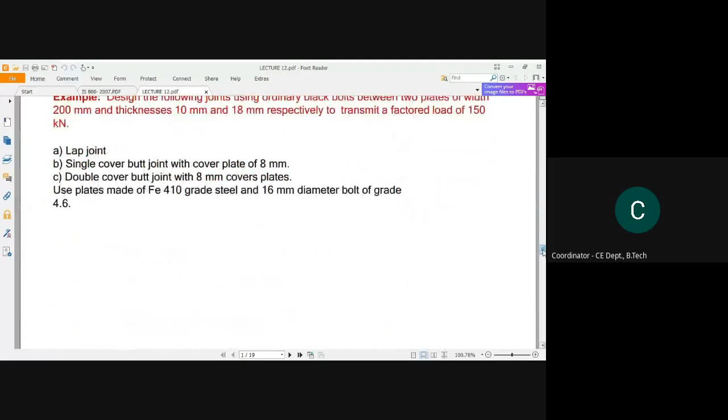In this question, it has been said that design the following joints using ordinary black bolts between two plates of width 200 millimeter and thickness 10 millimeter and 18 millimeter respectively to transmit a factored load of 150 kilonewton.

After reading any question, try to imagine that question in your mind. Think what is the question asking for. Here the question is given, you have to design a joint, and you have to design it in your own way with the help of IS code.

So IS code has given some limitation. We cannot just take any number of spacing or any number of pitch distance, right? So we have to follow that specification and then we have to design it.

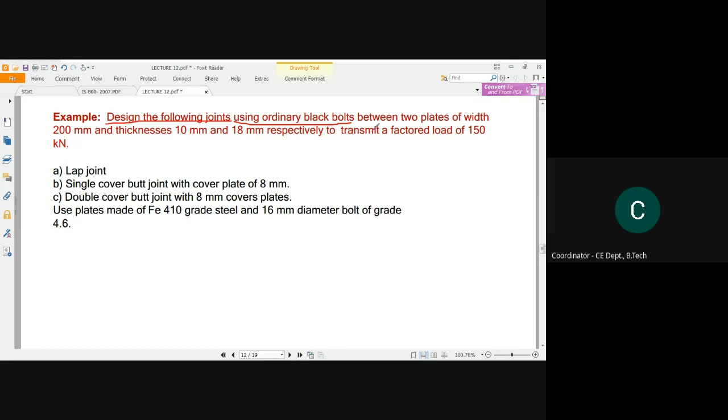The specifications provided in the question are that you have to design with two plates. The specification of the two plates are given: the width is 200 and the thickness is 10, and the other plate's width is similar with thickness 18. These plates have to carry and transmit a factored load of 150 kilonewton.

This means you have to design these connections in such a way that these plates can be able to transmit this amount of load.

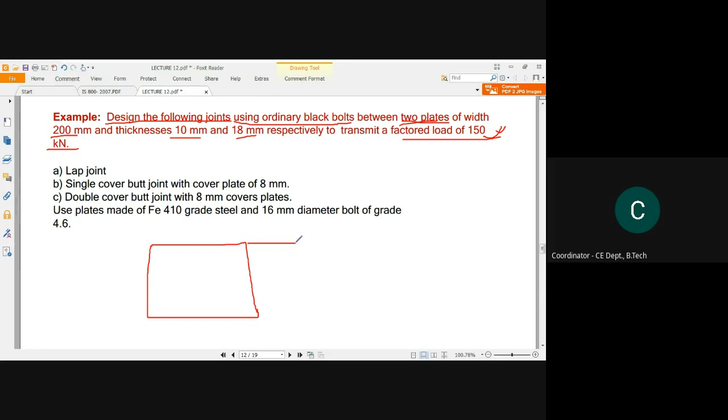This is the plate, this is one plate, and this is another plate. The bottom part is just behind this plate, so I am showing it with a dotted line.

Now the width is 200. This width will be similar for both plates, but the corresponding thickness is different. The thickness of this plate might be 10, and the bottom plate might be 18 millimeter thickness.

So you have to make a connection. You have to design this joint, or put a bolt in such a way that it can transmit a factored load of 150 kilonewton.

After reading this question, you have to be able to understand or picturize this thing in your mind. You have to design this connection.

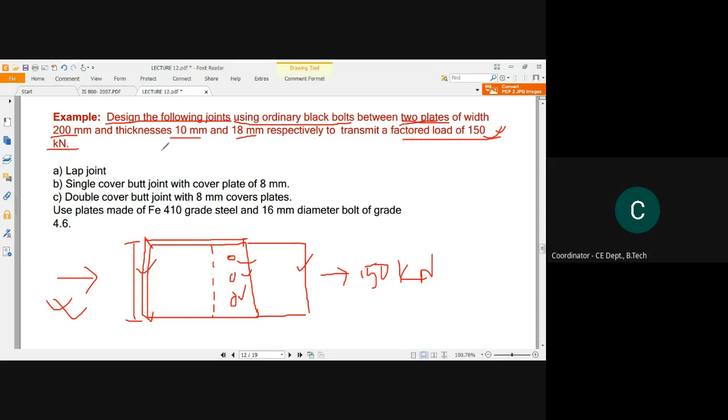Now here is the rest of the question. You have to design this as a lap joint, as a single cover butt joint with cover plate of 8 millimeter, and as a double cover butt joint with 8 millimeter cover plates.

So these three specifications have been given: design this joint first as a lap joint, second as a single cover butt joint with cover plate specification given, and third as a double cover butt joint. I have shown you these diagrams.

What do you mean by single cover butt joint? What do you mean by double cover butt joint? Please go through those PDF slides, you will understand that very easily.

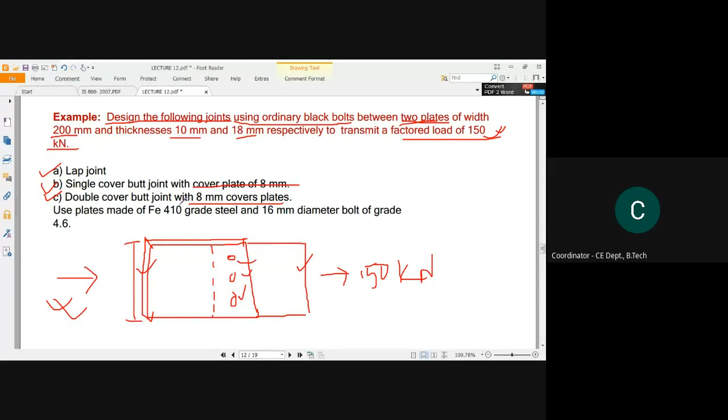Okay, so now let us start our problem. So these are our questions. This part is the question part.

Use plates made of Fe410 grade. So the ultimate tensile stress of the plate has been given as Fe410, meaning the ferrous ultimate tensile stress is 410 megapascal or Newton per millimeter square.

And 16 millimeter diameter bolt of grade 4.6 - the bolt diameter has also been given here, with the grade of 4.6. Let us start the solution.

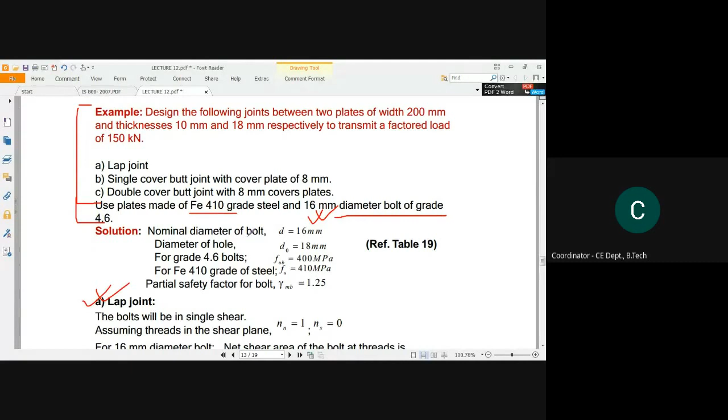We will first solve this connection as a lap joint. Now the nominal diameter of bolt is given as 16 millimeter. Let me zoom it in. So, nominal diameter is given as 16 millimeter.

So what does nominal diameter mean? D means, if this is the bolt, this is the nominal part - the nominal diameter. So now this is given as 16 millimeter.

Now, what will be the diameter of the hole? As I have just shown, see in Table 19 - this has been given in Clause 10.2.1. So here in the clause, when the nominal size of fastener diameter is given in this column, the corresponding clearance has been given in this column.

So what was our nominal diameter in the question? Anyone? What was our nominal diameter?

Why are you getting this? 16, exactly. So here, in the second row, it is given the nominal size of fastener.

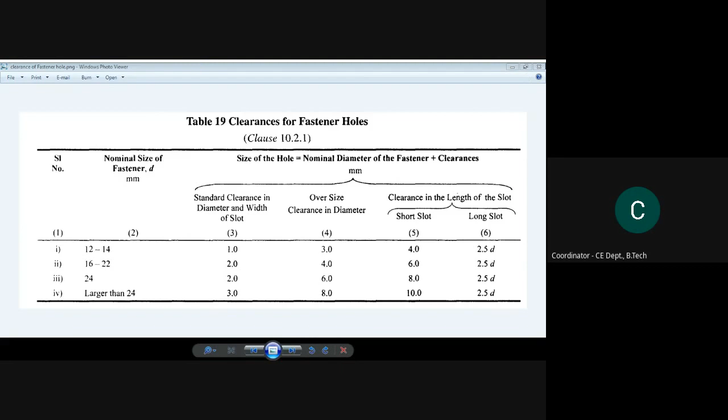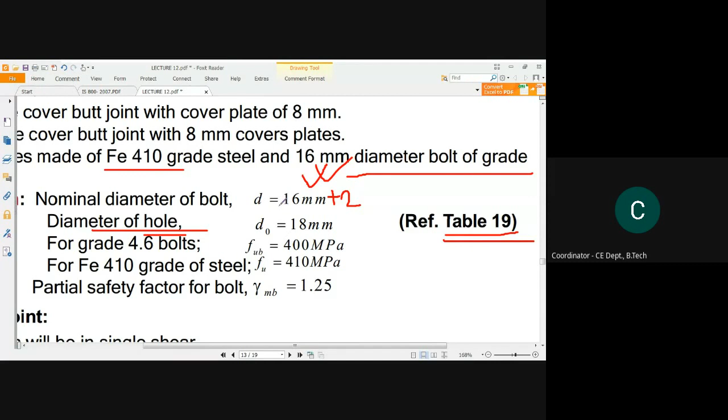In between from 16 to 22, you have to consider the standard clearance to be 2. So similarly we will consider 16 plus 2, referenced from Table 19 of IS 800:2007. So our diameter of bolt is this, and the hole we have to make over this plate should be 18 millimeter.

Now for Fe410 grade of steel, Fu is 410 megapascal, as I said. And the partial safety factor for bolt, gamma MB, is 1.25. This is provided in Table 5, please go through that gamma MB.

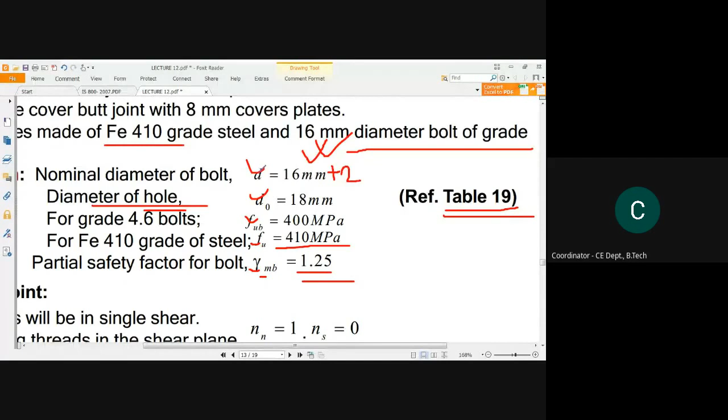So why am I considering these terms, D, D naught, FUB, FU, gamma MB? Why are we taking this? Because we will need this terminology when we solve the bearing strength and shearing strength of the bolt. That is why we are collecting all this data previously from the IS code.

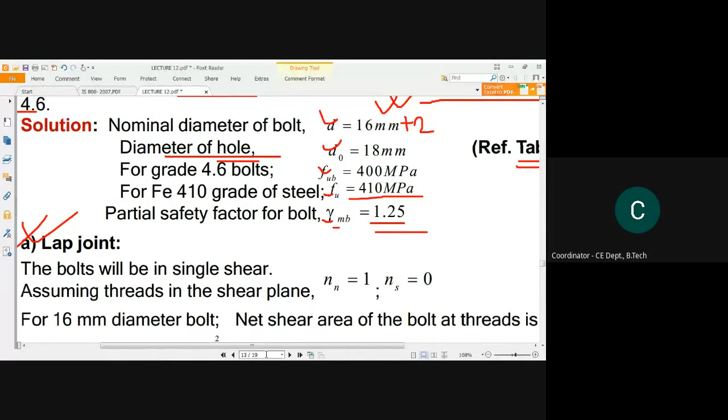Now see, the bolts will be in single shear. So why, how can you presume it will be in single shear? Why not double shear? Because see, this was the joint, right?

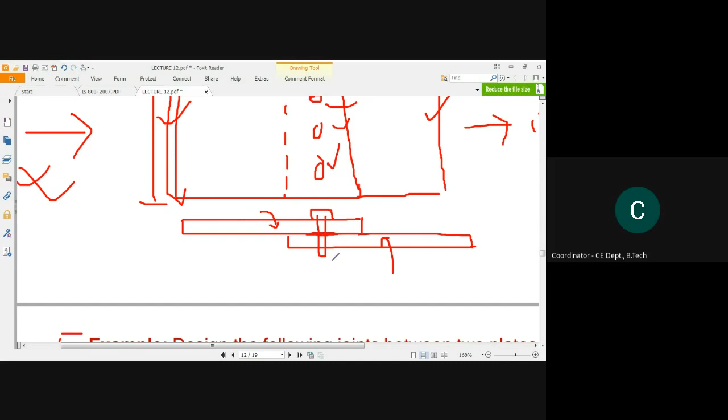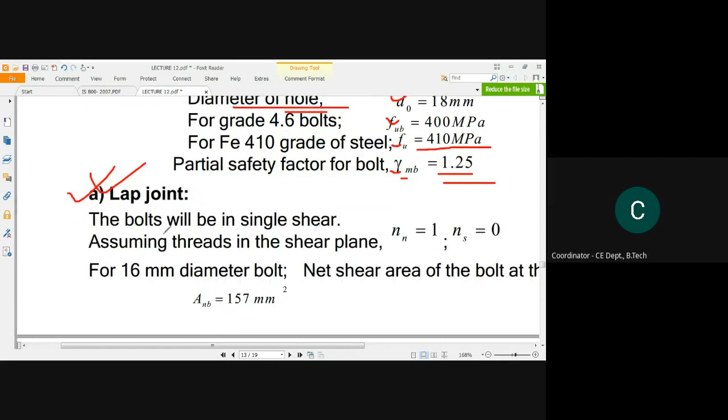So if I draw it from this side, this is the side view I'm showing. So the bolts will be somewhat in this way, isn't it? Here the bolt only has one shear plane provided by these plates. That is why the bolt will only have single shear in that case, because the bolt will be lying in between these two plates, and these two plates will create one shear plane. That is why the bolt will be in single shear.

So I said earlier here, let me just erase it. See, say if this is the 18 millimeter thickness plate, and this is the 10 millimeter thickness plate.

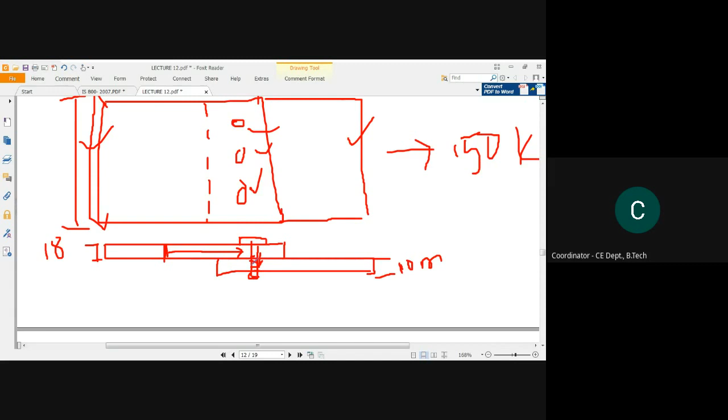Now the bolt, when we are inserting that through the hole, the maximum part will be occupied by the shank of the bolt. So the shear plane may shift just below, or it may go below to the threaded part. If the threaded part starts from here, basically the threaded part has spread to the maximum part of this bolt. So we will assume that one plate will lie upon the thread.

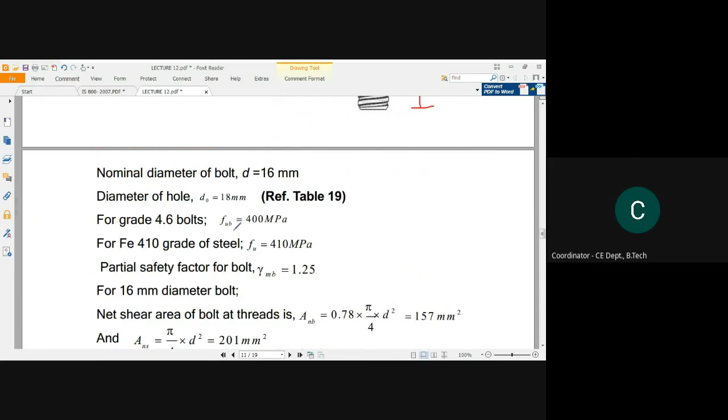This is basically a general scenario, that a shear plane lies between the threaded part. So here, that is why NN is considered to be 1, NS is considered to be 0.

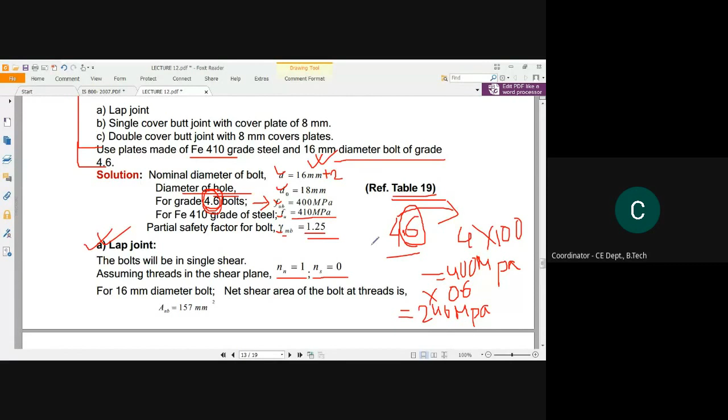So is there any problem observing this grade 4.6? In previous class I told that 4.6 grade means 4 into 100 times, meaning 400 megapascal will be the ultimate tensile strength of bolt, and 400 into the rest, 0.6, that is 400 into 0.6 will be 240 megapascal. So this will be our yield stress of the bolt. So from this 4.6, you can get the value of the ultimate tensile strength of bolt.

Say if this 4.6 was designated as 5.2, just considering, so what will be the ultimate tensile strength of bolt? It will be 5 into 100, 500, and the yield stress will be 500 into 0.2, 100 megapascal. Clear? Yes ma'am.

So this is not given in the IS code. You have to calculate this from the bolt grade given. It will be given in the question.

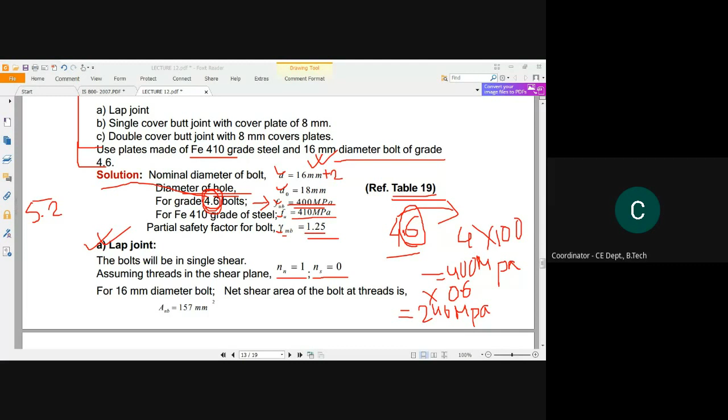Now we can easily calculate the area of the bolt. How? We have been provided with the diameter 16 millimeter. So pi by 4 into d square. Do that, you will get this. If you have a calculator along with you, just calculate it. If you put the value of 16 in place of d, you will get 201 millimeter square.

This has been given 157 millimeter square because we are considering the net shear area. Net means reduced value. Let's look at this diagram to see what's happening here.

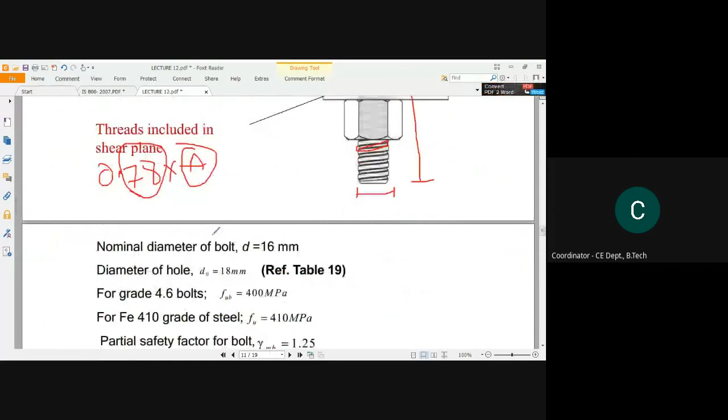This is the way you have to calculate Anb and Asb. So what was our Anb and Asb here? Let us see - Anb is the net shear area of the bolt at threads, which may be taken as the area corresponding to the root diameter at the thread.

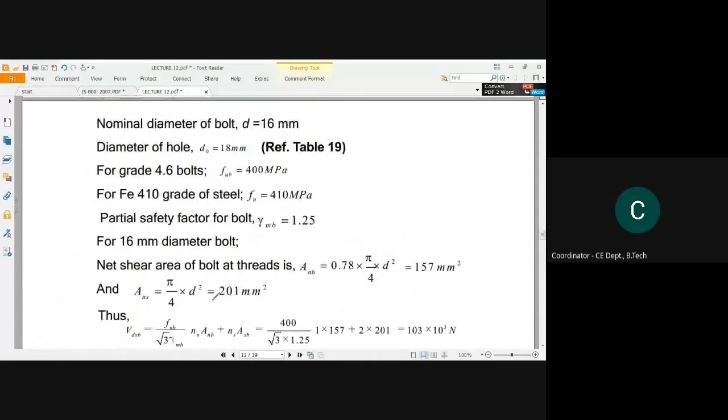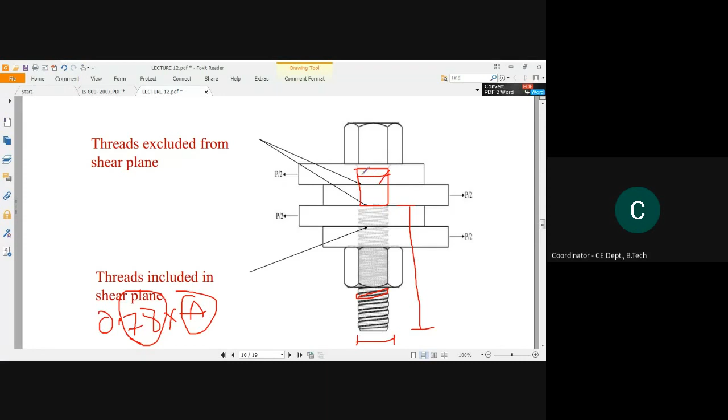And what is Asb? Asb is the nominal plain shank area. This will be our 201 only, because in the shank part there is no reduced area. So this will be pi by 4 into d square, where d is the diameter of the bolt, 16 here. So it will be our 201 only.

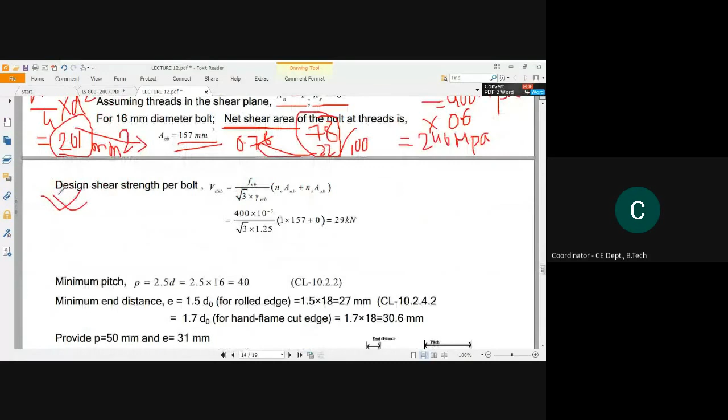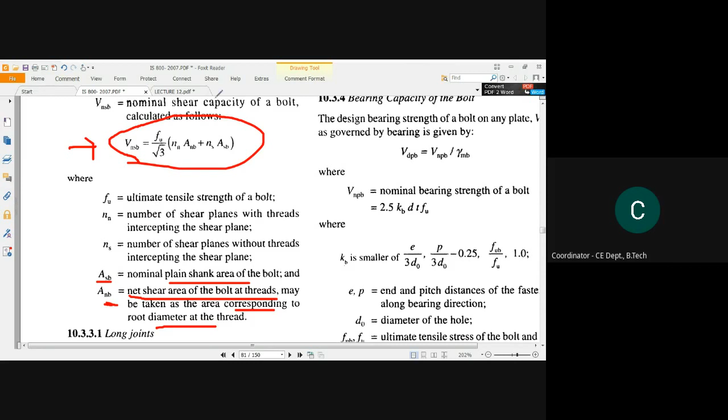Now let us come to the formula for design shear strength per bolt. This is the formula, I am showing you with respect to the IS code. In some initial problems I will show the corresponding IS code formula, but after showing you numerous numerical problems, I will not go through this IS code.

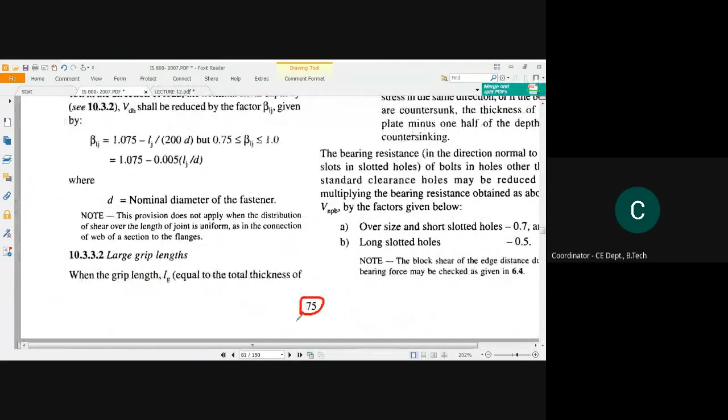I will presume you have understood all the clauses, pages and formulas. So for a few problems I will show the IS code formula alongside. This is the formula given in clause 10.3.3, page number 75. Now put all the values.

See here it is Fub - B here means it belongs to the bolt. Remember this is the ultimate tensile stress of bolt, Fub, and it is divided by root over 3 into gamma mb, into nn into Anb plus ns into Asb. Now the bolt's value that we got, I'll put it here.

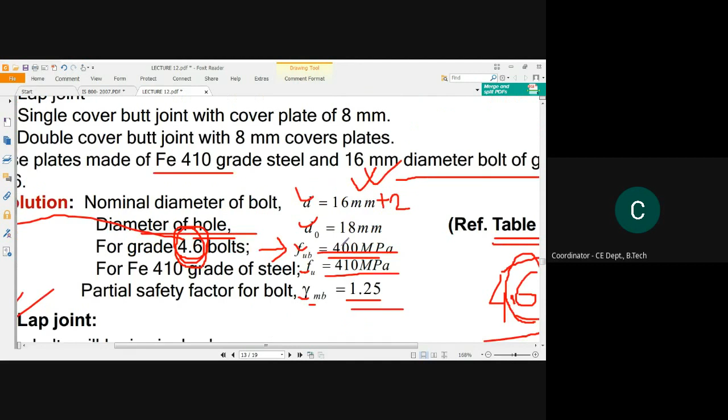This is in megapascal, but I need to convert it into kilonewton. So here it has been divided by 1000, meaning 10 to the power minus 3. It has been divided just to convert into kilonewton, because this value is in megapascal, and megapascal means Newton per mm square. So to get it in kilonewton, we have to divide by 1000. That's why this has been put here.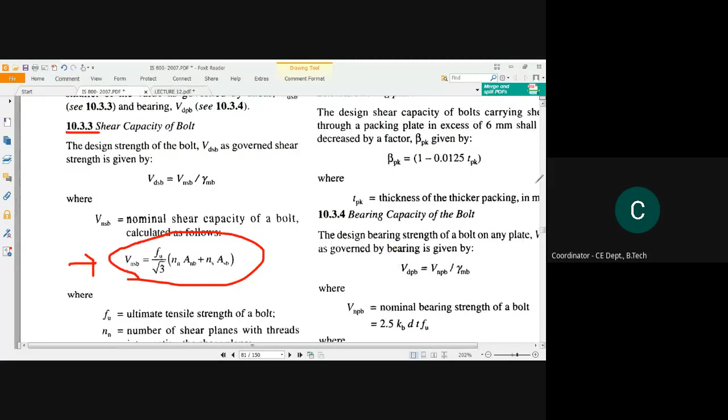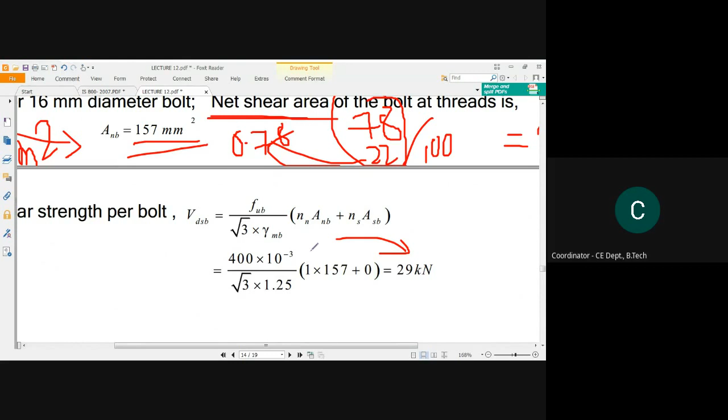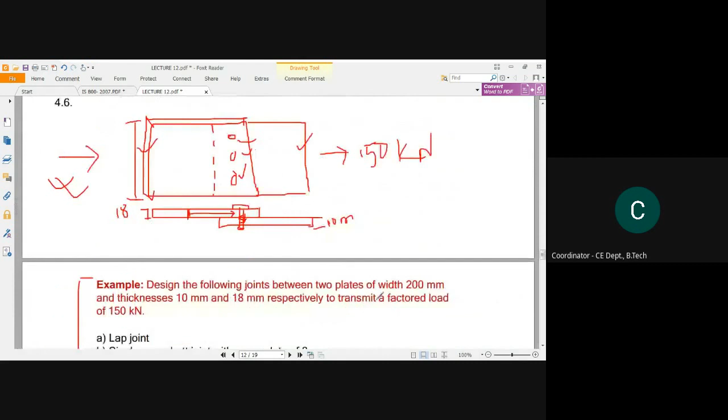Divided by root over 3 into gamma mb, which is given as 1.25 in table 5. Please go through this IS code yourself. Now see the net area - how many shear planes are lying in between the bolt here. Let's not show you this diagram, let me draw it instead.

In the previous plane it was like this - here was the plate, this is the bolt part, and the shank part has started from here, right? So here the threaded part is taking the shear plane.

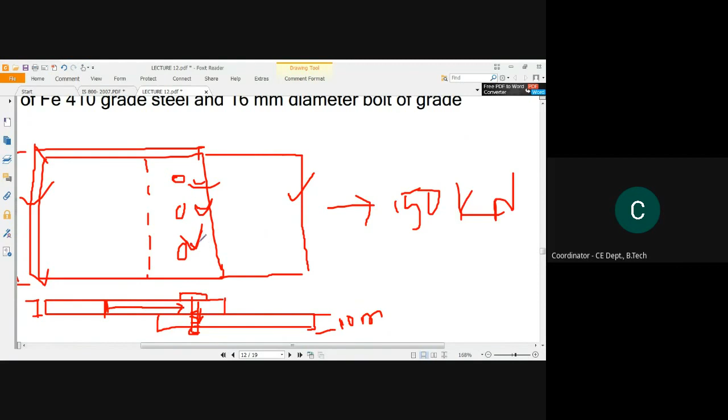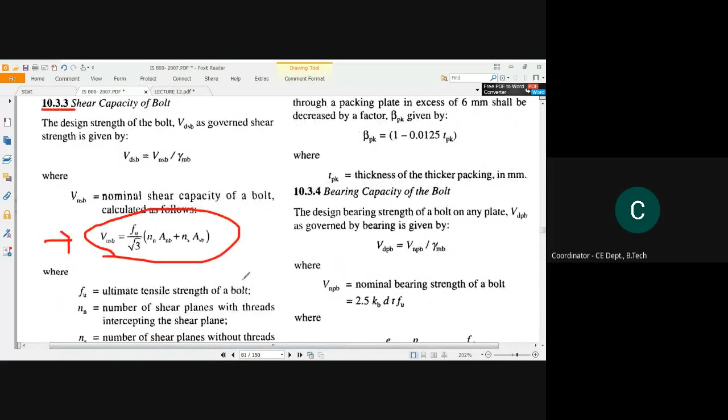Ab dekho hamko minimum pitch calculate karna hai, because in order to calculate the bearing capacity of bolt, see what was our formula - this was the formula 2.5 into kb into d into t into fu.

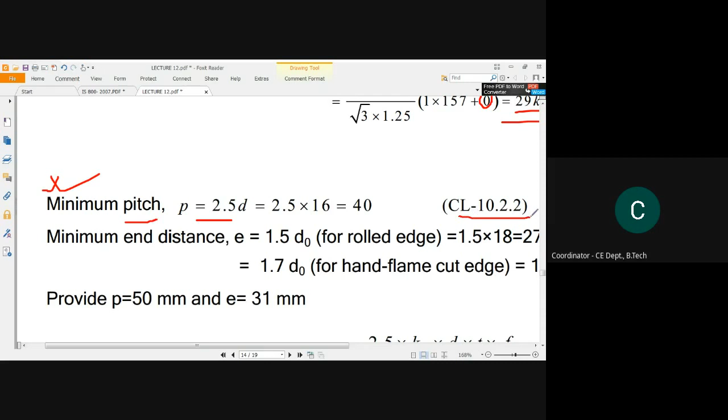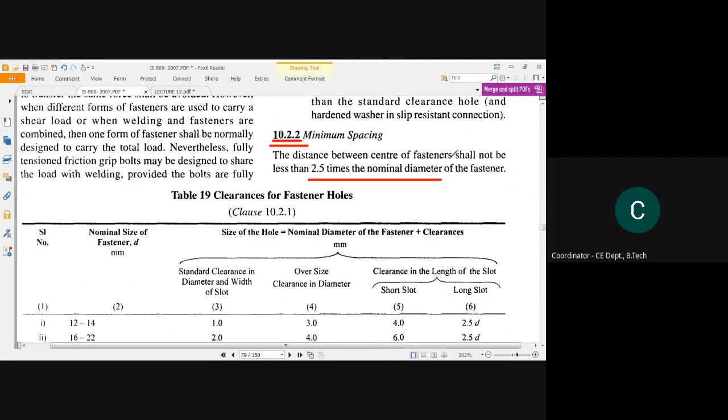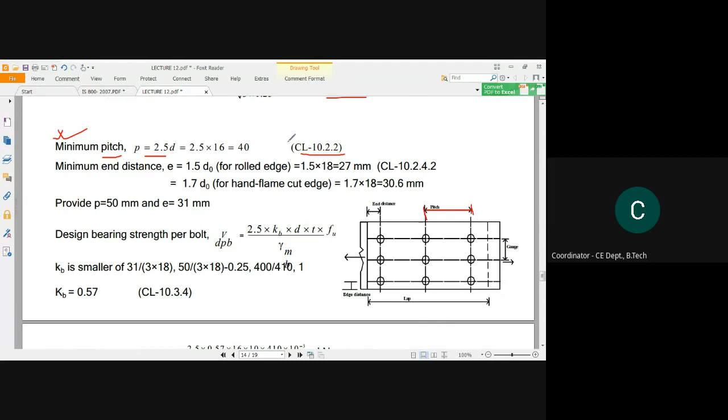See, this is the 10.2.2 clause, here minimum spacing given - the distance between center of fasteners shall not be less than 2.5 times the nominal diameter. Distance between center of fasteners matlab kya hai, wo to pitch distance hi hai. Dekho yaha pe pitch kya tha, pitch to ye distance tha na, to ye kya distance hai hamare ek fastener se dusre fastener ka center to center distance, to ye hamko is clause se mil jata hai.

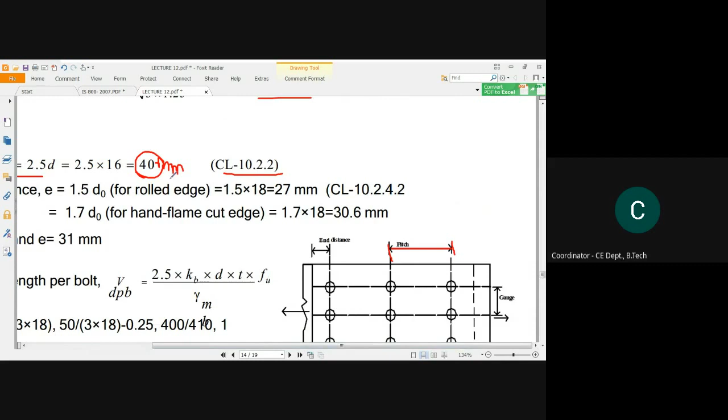This will be p equal to 2.5 d, so d we will put the value, we have got that 40 millimeter will be the minimum pitch distance, matlab ki hamko ek fastener se dusre fastener ka jo gap rakhna hai wo minimum 40 hoga, 40 millimeter hi hoga.

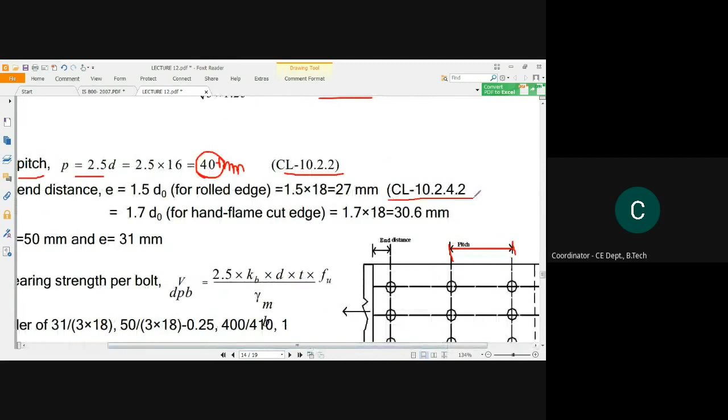Okay, now we have to calculate the minimum end distance, so this has also been given in the IS code which is in clause 10.2.4.2. Okay, so let us get into that 10.2.4.2, where is that.

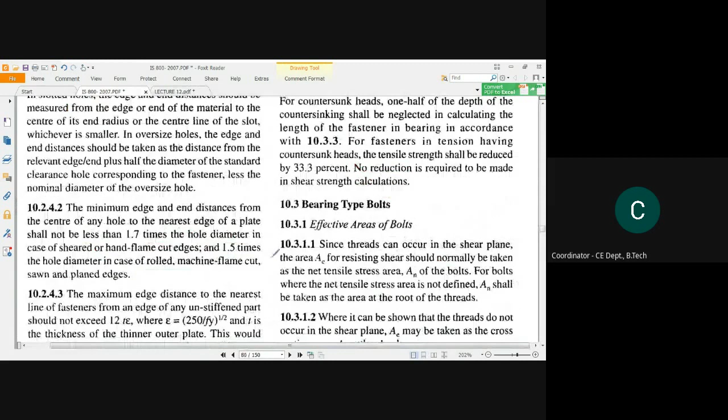Yeah, see here it is given, the minimum edge and end distance from the center of any hole to the nearest edge of a plate shall not be less than 1.7 times the hole diameter in the case of sheared or hand flame cut edge and 1.5 times the hole diameter in the case of rolled machine flame cut.

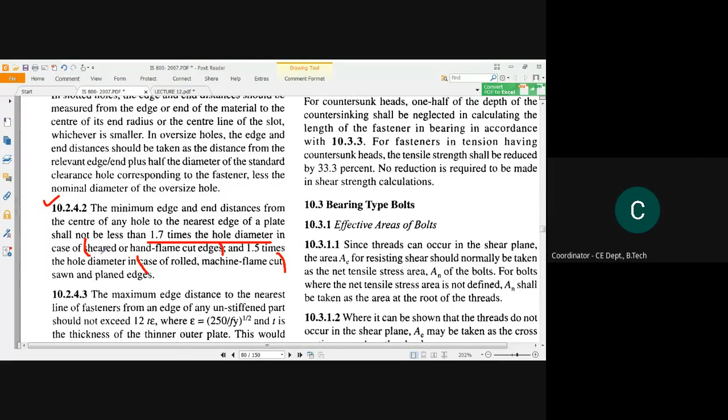Isiliye that is why see here it has been multiplied with - see here it is given hole diameter, okay, that is why we have to multiply with d naught, d0, okay. So d naught for rolled edge - 1.5 for rolled edge and 1.7 for hand flame cut. So we have multiplied with both of that.

So hamara jo diameter ka hole tha wo kya 16 plus 2, 18 tha. So after multiplying this we will get our minimum end distance to be 27 mm.

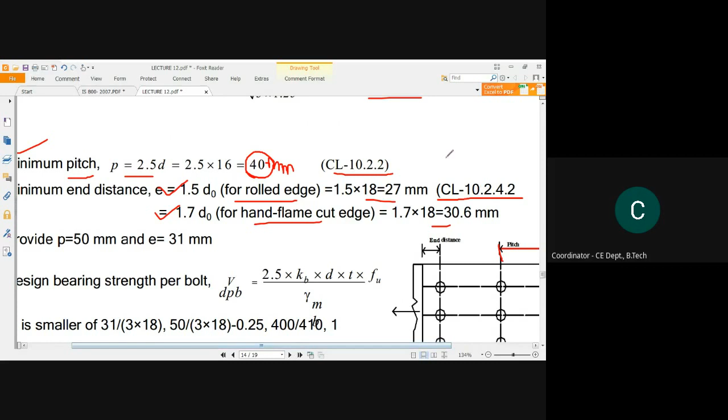See kb, what was our kb? The first formula was E divided by 3 into D naught.

Mean how much is our E here? So here see E has been considered. So this E has been considered for hand flame cut edge. Okay, it has been considered hand flame cut edge. So you can consider this, just mention it that you are considering this one. Okay, so now if you would have considered this one, then mention it also.

So because you are doing design, whatever specification you consider, please mention it, as per that you can design it. But in here this part, this formula has been considered, so I am following this.

See here it was 30.6. Now taking 30.6 millimeter in the field is very difficult, so we approximately consider it as 31 millimeter. We can't take more than that because it's the minimum end distance.

See here, E divided by 3 into D naught, what was our formula? So E is 31, divided by 3 into D naught which is 16 plus 2, that is 18. So we will get some amount. Whoever has a calculator, calculate this and tell me: 31 divided by 3 into 18. Ma'am, 0.574. Okay.

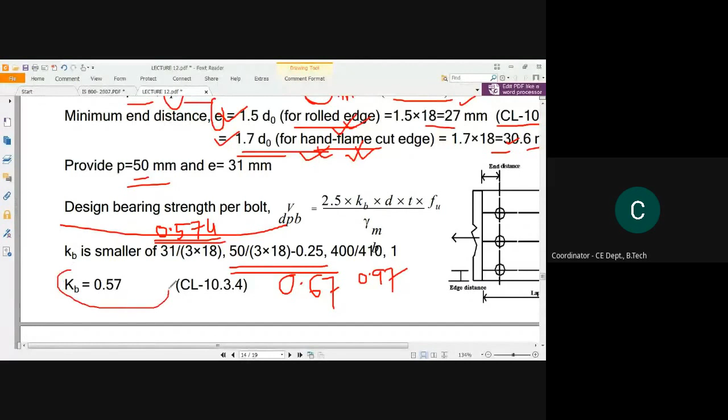0.97. Okay, and the last is 1. Now out of these four formulas, we need to take the smallest value. So what is the smallest value among these? It is 0.574, which we got from this formula. That is why KB has been considered to be 0.57. So for this formula we have evaluated.

We got it. Next is D. So what is D? D is the diameter of the bolt. So 2.5 into 0.57 into 16, we got D, into T. Now which T will we take? T will be considered to be the minimum thickness of the plate. Whichever thickness is given for both plates, we have to take the minimum one.

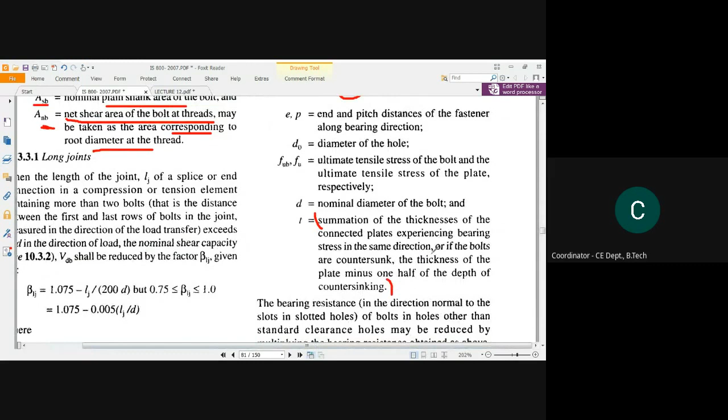See, here it is given the summation of the thickness, it has been presented in a way you will get confused if you just see that. So let's just remember, you have to consider the minimum thickness of the plate here, into Fu, the ultimate tensile strength of the plate.

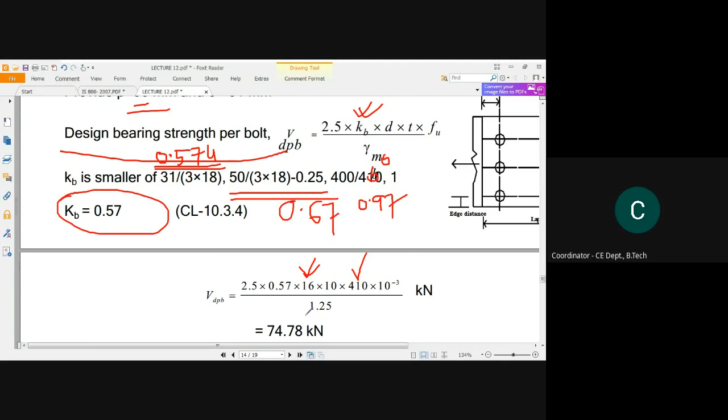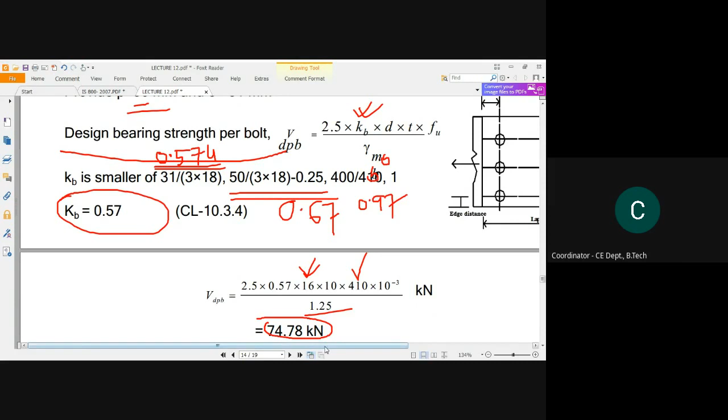Okay, and to convert this into kilonewton, divide by 1000, then divide by gamma mb. Here B has shifted, this will be gamma mb, which is 1.25. Now if you calculate this, the value comes out to be 74.78. You should verify this value, I believe approximately this answer would come. Now see, therefore the bolt value is 29.

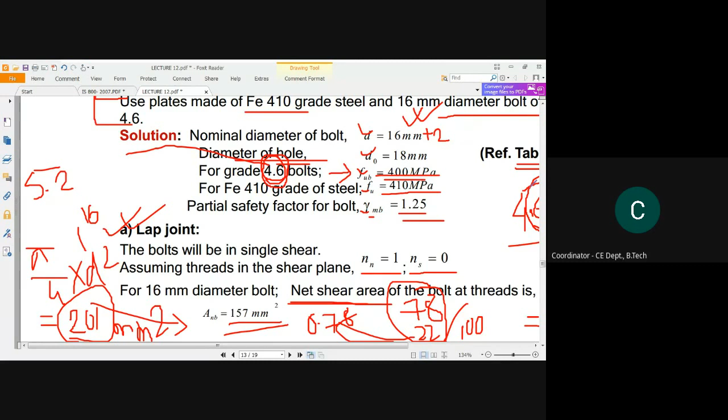So here we can see that in bearing strength, the bearing strength of the bolt is more than the shearing strength of the bolt. That is why we will go to the weakest, we will consider this value while designing.

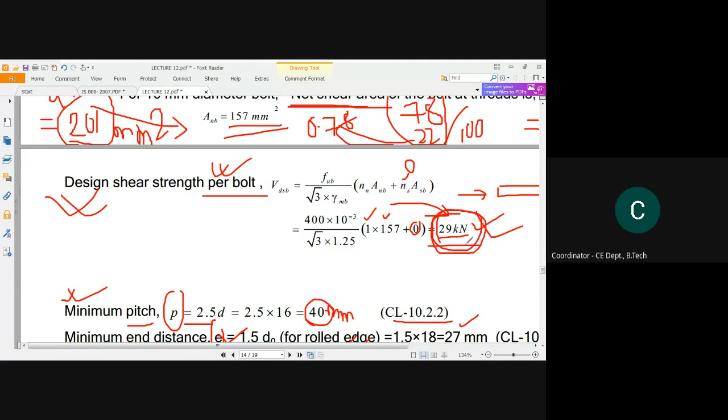तो अगर मैं ये जो 4 सब्जेक्ट है बोल्ट का, इस 4 सब्जेक्ट को मैं अगर पास करवा दूं अच्छे तरीके से, तो ये तो इस सब्जेक्ट में पास है, ये तो ज्यादा मार्क्स ला ही रहा है ये बोल्ट बियरिंग स्ट्रेंथ में, isn't it? So that is why we will consider the bolt value to be 29. This is the logic behind that.

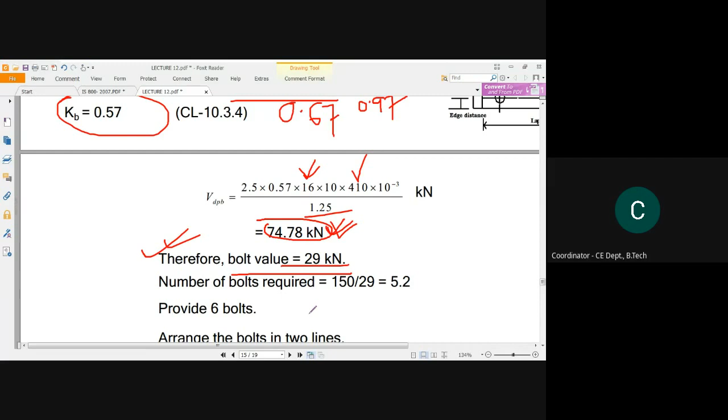Okay. Now number of bolts required. अब कितना सारा बोल्ट हमको लगेगा, तो अब हमको शेयरिंग स्ट्रेंथ क्या, देखो यहाँ पे और एक लॉजिक मैं बताना चाहूंगी. सी, बियरिंग स्ट्रेंथ में हमारा क्या आ रहा है 78 किलो न्यूटन अप्रोक्सीमेट, एंड शेयरिंग स्ट्रेंथ में कितना आ रहा है 29 किलो न्यूटन अप्रोक्सीमेट.

अब क्या ये 78 किलो न्यूटन तो बोल्ट का जो ये तो ज्यादा है, पर क्या अगर ये शेयरिंग में फेल होने का चांस सबसे ज्यादा है जो कि मैं अभी बताई, तो अब ये जो 150 किलो न्यूटन का जो लोड ट्रांसमिट होगा, एक्सटर्नल जो फोर्स आएगा, ये जब ट्रांसमिट होना शुरू होगा तो ये सबसे वीकेस्ट फोर्स ऑफ द बोल्ट को पकड़ेगा, तो ये फोर्स के वजह से ये बोल्ट शेयरिंग में ही फेल होना चाहेगा, isn't it? सो हमको इसीलिए इसी वैल्यू से डिजाइन करना चाहिए.

तो अब देखो ये तो पर बोल्ट का शेयरिंग स्ट्रेंथ ये है, तो हमें कितना सारा बोल्ट देना पड़ेगा, तो हमारा जो लोड ट्रांसमिट हो रहा है वो क्या है 150 किलो न्यूटन, और हमारा जो इंडिविजुअल बोल्ट का स्ट्रेंथ हम कंसीडर कर रहे हैं वो कितना है 29. तो हमको नंबर ऑफ बोल्ट कितना मिलेगा, कितना लेना चाहिए, बोलो

एनीवन? इसको मैं और एक सिंपल एग्जांपल से समझाती हूँ. अगर इफ one bolt has the capacity for shearing strength to be 29.

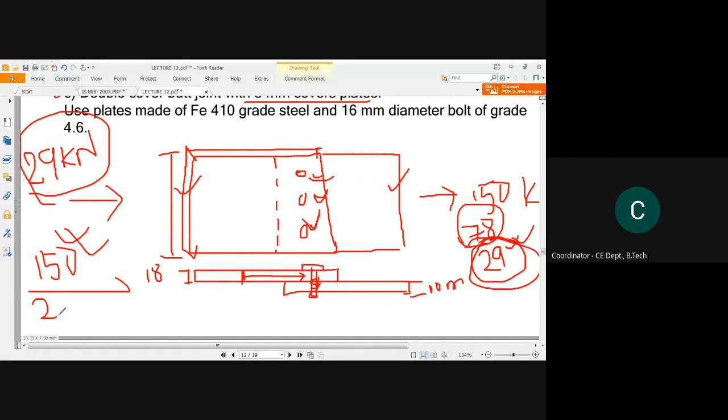Okay, तो 150 एक्चुअली ये थोड़ा उल्टा कर दिया, सॉरी. If 29, see, 29 kilonewton of force, shearing force capacity is taken by one bolt, then how much of bolt is required to take the force of 150 kilonewton? Have you got me? अगर एक बोल्ट 29 किलो न्यूटन ले सकता है तो 150 किलो न्यूटन कितना बोल्ट ले सकता है? ये डिवाइडेड बाय 29 कर देते हैं तो कितना आएगा? कैलकुलेट करो.

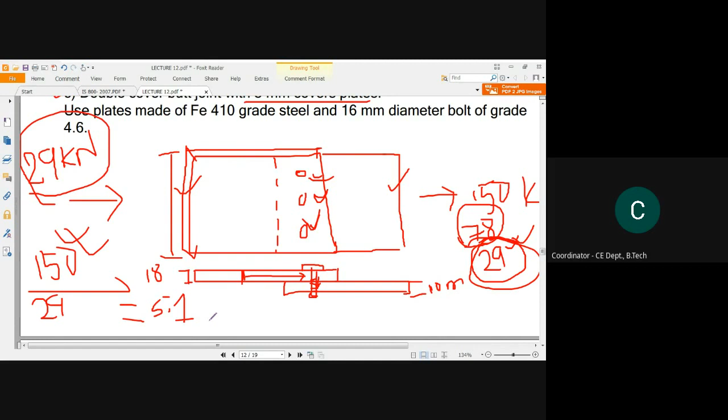5.1. 5.1. अब ये 5.1 नाम का तो कोई बोल्ट का नंबर हम नहीं ले सकते. 5.1 क्या नंबरिंग हुआ? तो इसीलिए दैट इज व्हाई सी ये अप्रोक्सीमेट वैल्यू ये आया है. तो प्रोवाइड 6 बोल्ट फॉर सेफ फॉर. अब एक्स्ट्रा अगर एक बोल्ट ले लेंगे तो फॉर सेफ्टी पर्पस वो तो अलाउ हो ही जाएगा, isn't it?

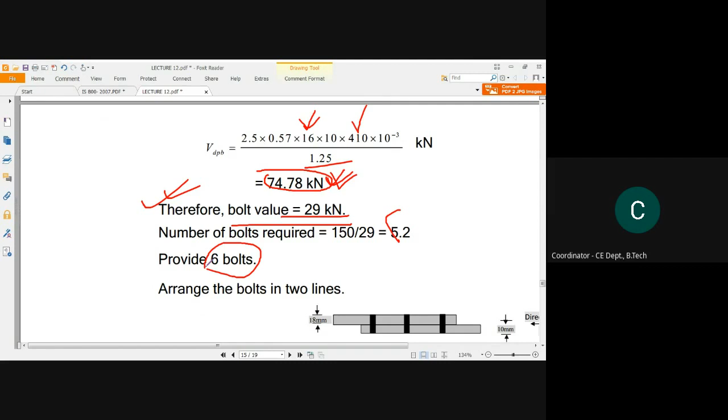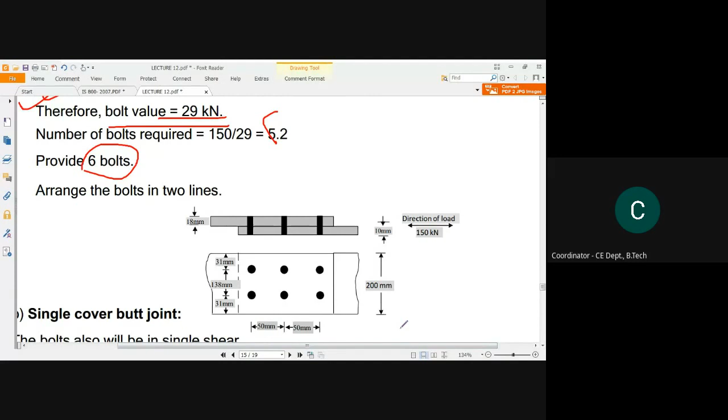So we can arrange the bolt in 2 lines just because we are designing, right? तो हम कैसे भी डिजाइन कर सकते हैं इसको. तो 6 बोल्ट लेंगे तो 6 बोल्ट अगर इस पे अगर 6 बोल्ट ऐसे ही मतलब कॉन्जिक्यूटिवली डालेंगे ऐसे 1 2 3 4 5 6 तो क्या होगा? यहाँ पे हमारा जो ये डिस्टेंस है ये मिनिमम डिस्टेंस तो हम वायलेट कर देंगे ना जो हमारा आईएस कोड में दिया गया है, क्योंकि स्पेस बहुत ही घट जाएगा.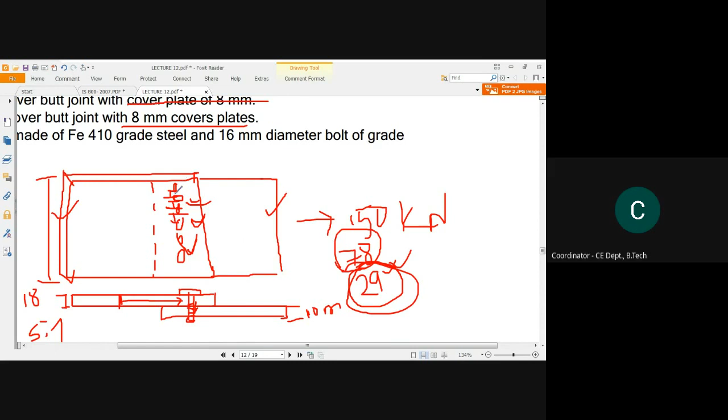तो हम और क्या मतलब उपाय निकाल सकते हैं? तो इसको हम ऐसे डिस्ट्रीब्यूट कर दिए हैं 3-3 ये दोनों रो में 3-3 बोल्ट करके दोनों रो में कर दिए. अब देखो हमारा जो एंड डिस्टेंस, आवर एंड डिस्टेंस वाज 31 मिलीमीटर. तो ये हमारा सेंटर फ्रॉम द बोल्ट ये 31, यहां से भी 31. ओके, और ये हमारा पिच डिस्टेंस क्या आया था? 50.

सो जस्ट फॉलोइंग ऑल दीज instruction or the specification given by IS code, we can design this bolting arrangement in this way. तो इसका width था 200 मिलीमीटर. देखो ऊपर का thickness ये 18, the bottom plate thickness is 10 and the direction of load is this. So इसको तुम्हें draw करना है. अब देखो ये जो गैप रह जाएगा बीच का ये 200 माइनस 62 करोगे तो ये वाला डिस्टेंस निकल जाएगा 138 मिलीमीटर. ओके, दैट यू कैन कैलकुलेट.

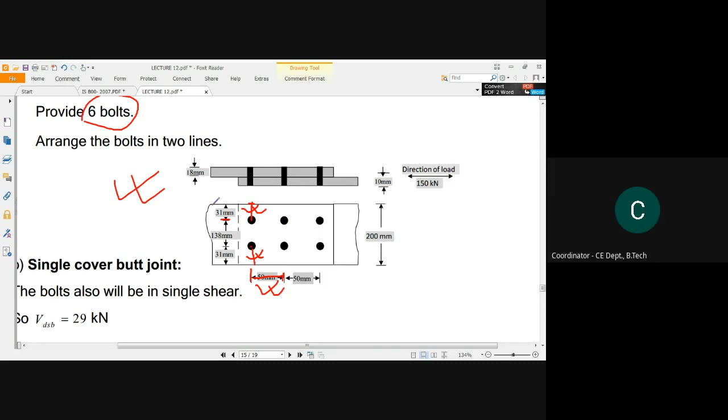तो ये ड्रॉ करना इंपॉर्टेंट है क्योंकि तुम जब डिजाइन करोगे तो तुम अगर ड्रॉ करके ये नहीं दिखाओगे कि देखिए क्लाइंट को नहीं दिखाओगे कि मैं ऐसे डिजाइन की हूं तो वो कैसे समझेगा. तो हमको ये ड्रॉ करना है. इंजीनियरिंग का भाषा ही है ड्रॉ करना, ड्रॉ करके ही समझाना पड़ेगा. ओके, सो दिस इज द प्रोसेस ऑफ डिजाइनिंग अ लैप जॉइंट.